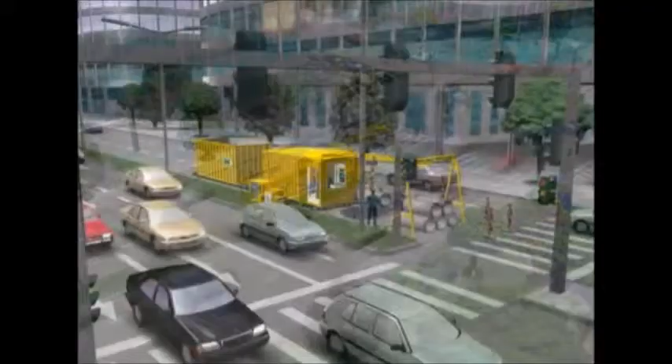The construction site can be located in a way that only one lane is affected.

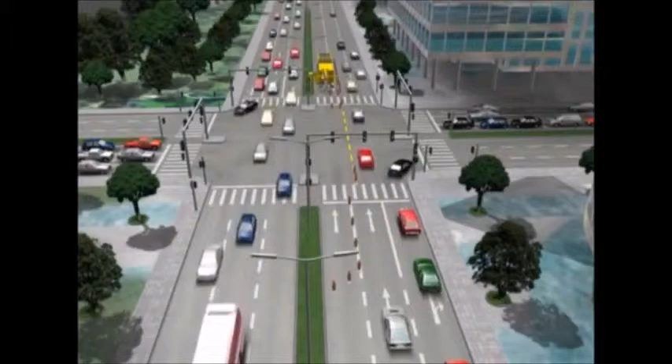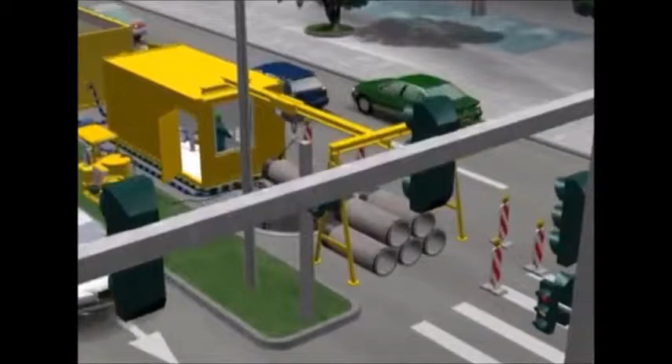In our example, 150 meters of sewer pipes are to be jacked from the launch shaft to the reception shaft. At the first stage, the area around the starting shaft is cordoned off and traffic is diverted to the remaining lanes. Due to the compact design of the machine and the small diameter of the starting shaft, there will only be minor disruption to the traffic flow.

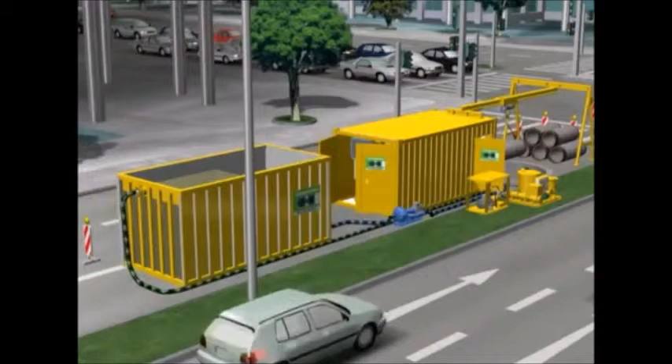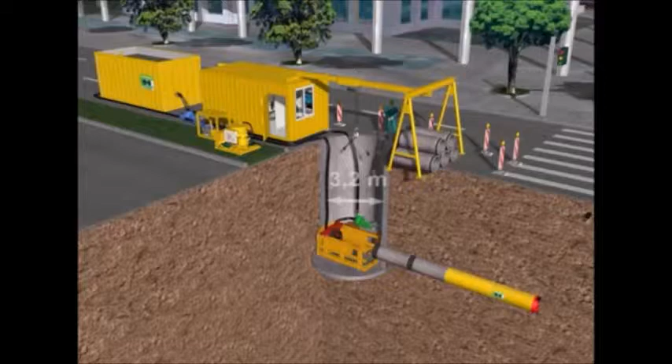In this case, the start shaft consists of a round shaft of reinforced concrete with an inner diameter of 3.2 meters. The compact jacking frame is then placed into the starting shaft, and the slurry discharge pump is mounted on a platform adjacent to the jacking frame.

The operating container with the control panel and the hydraulic power pack is located on the top rear side of the shaft. A pipe stock is established and maintained in front of the shaft to feed the shaft crane. The slurry feed pump and the slurry discharge pump are connected to the settlement tank to form a closed slurry circuit.

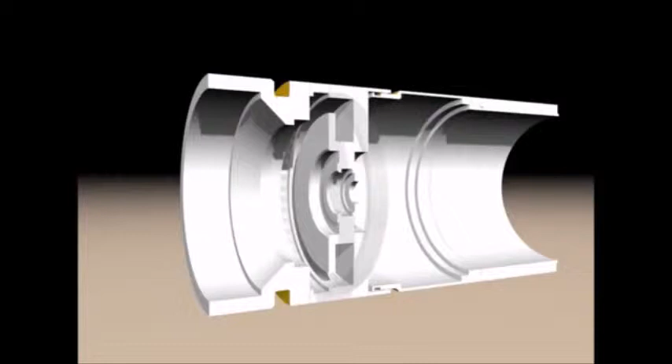The AVN 600 machine consists of several segments. A sleeve shaft with 3 boreholes connects the cutting wheel with the drive unit. The mix of crushed material and slurry water is sucked off through these boreholes by the discharge pump.

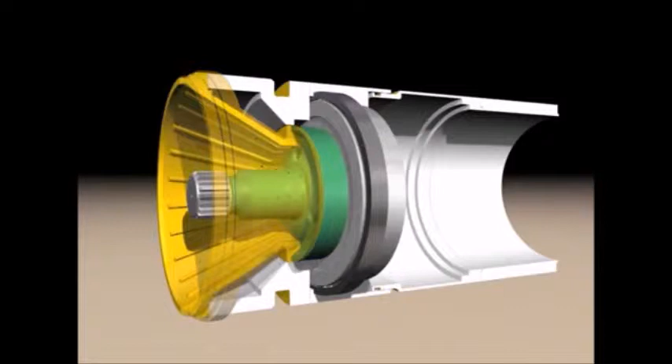The conical crusher situated in front has reinforced crushing bars and is provided with nozzles to inject the slurry water. The sleeve shaft, which is connected to the cutting wheel, is driven by hydraulic motors.

The sleeve shaft is seated in a tapered roller bearing. 3 hydraulic motors transmit the rotation via the gear rim to the sleeve shaft and the cutting wheel.

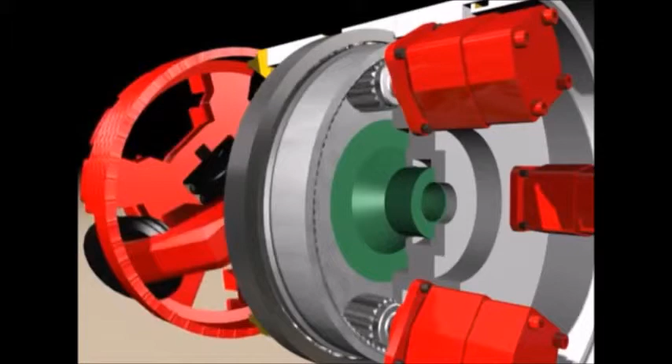3 steering cylinders enable the operator to correct the direction of the tunnel boring machine, as well as control the alignment of the machine in curved drives. Therefore, the position of the cutter head is continuously updated with the help of the laser guidance system.

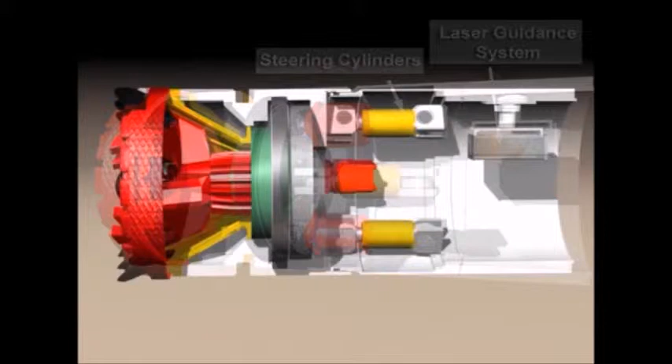To ensure the AVN 600 has a smooth method of excavation, the machine has 2 integrated water circuits. The standard circuit supplies slurry water to the annulus via 5 hoses fixed to the inner side of the bulkhead.

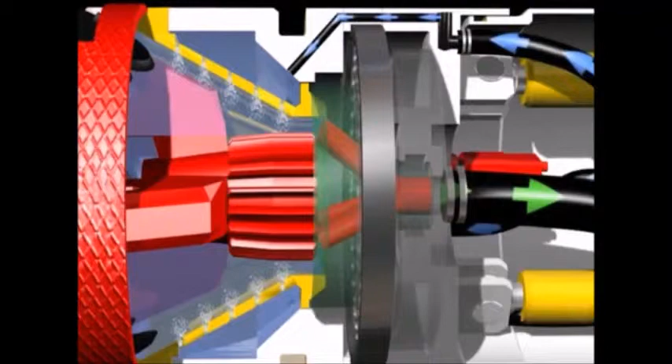Several boreholes branch off from the annulus, which supply the chamber situated behind the conical crusher. The slurry water is continuously pumped through the conical crusher chamber, sucked off through the boreholes of the sleeve shaft, and transported back to the settlement tank by the discharge pump.

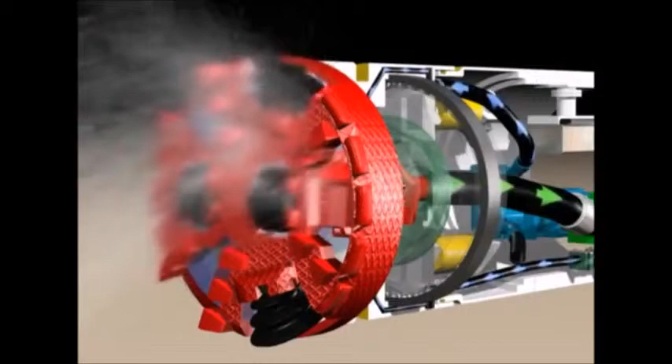A second hose supplies the high-pressure nozzles used in the conical crusher. These nozzles avoid clogging and agglutination in the crusher chamber in case of cohesive soils. They cut the clay in the crusher chamber with 250 bar water pressure, making material transport easier.

There are also 2 nozzles directed to the front part of the cutting wheel. This depends on the geological situation, as the number of nozzles can be increased. The water coming from the nozzles is mixed with the water of the slurry circuit and the excavated material. The whole mix is then transported to the settlement tank.

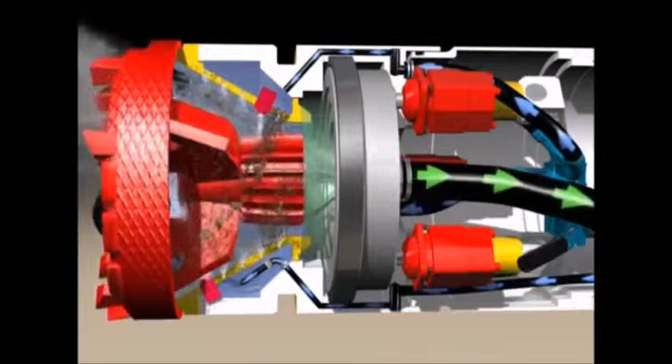The cutting wheel excavates the material at the tunnel face. In the crusher chamber, the material is ground down to the appropriate grain size by the spokes of the cutting wheel, which operates on the same principle as a coffee grinder.

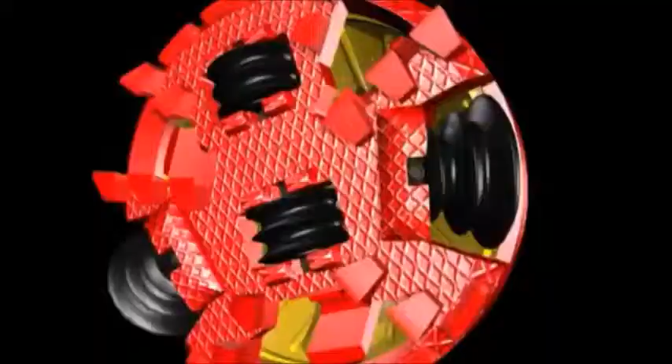Large stones are crushed by the discs of the cutting wheel. Sometimes fragments are displaced into the surrounding soil. Stones attaining the crusher chamber through the openings of the cutting wheel are crushed by the reinforced conical crusher and the spokes of the cutting wheel, and afterwards transported together with the slurry water to the surface.

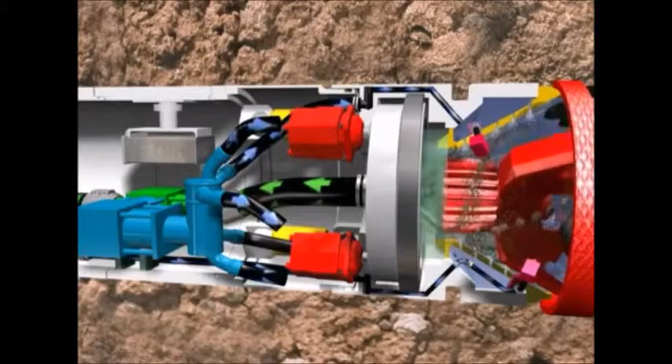The material is picked up in the slurry circuit and transported to the settlement tank through the central slurry discharge hose. The slurry feed and discharge lines pass through the jacking pipes via the jacking frame up to the surface.

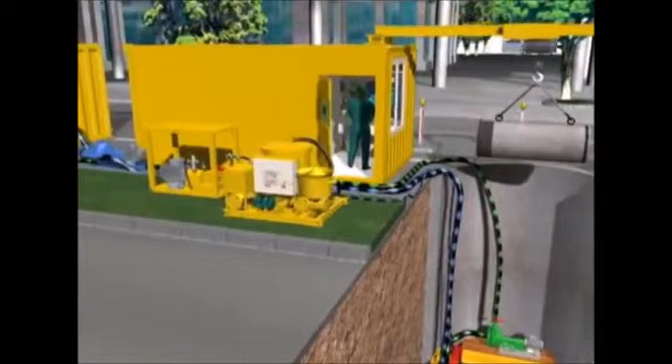The slurry discharge pump removes the excavated material and pumps it up into the settlement tank, which consists of 2 chambers.

At first, the excavated material is pumped into the rear chamber, where it settles due to gravity. The overrunning water is collected in the front chamber, from where the clean water is sucked by the slurry feed pump and returned to the slurry circuit, creating a closed system.

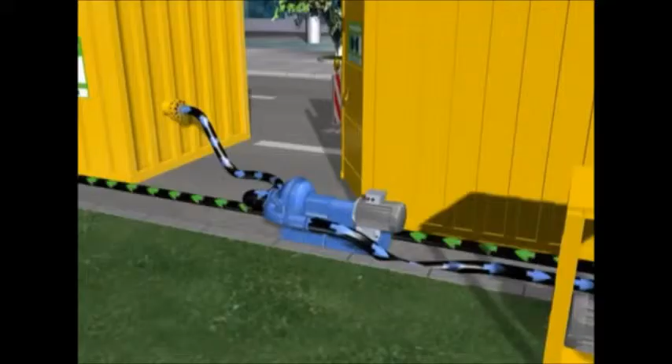The product pipes are lowered into the shaft, one after the other. The jacking frame works in 3 stages. After approximately 1/3 of the maximum jacking stroke, the jacking arms return and the main thrust ring of the jack can advance further.

After jacking the product pipe, all supply lines, such as hydraulic hoses, are disconnected. The jacking frame is returned to its original position and the next product pipe is lowered. This procedure is repeated again and again until the whole drive length is completed, reaching the reception shaft.

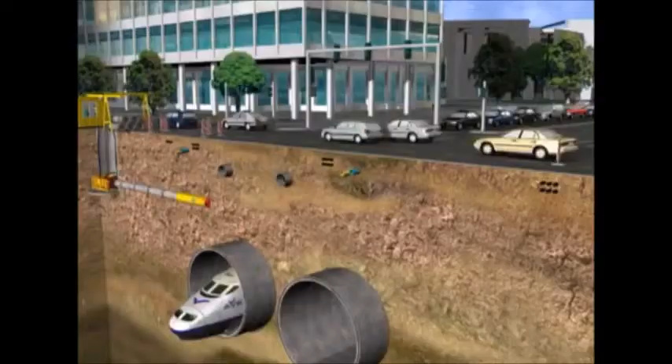Crossing pipes and buildings can easily be overpassed or undercrossed with this technique. Thus, the machine arrives in the reception shaft exactly at the planned coordinates.

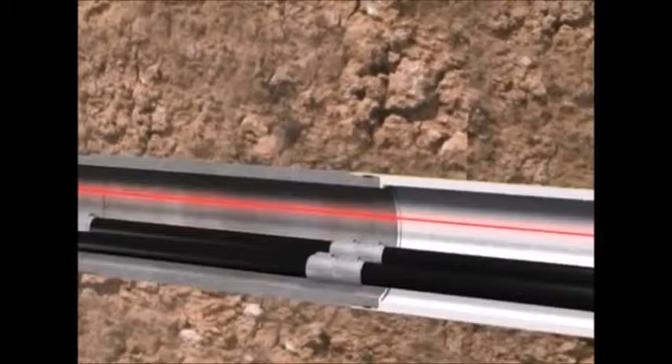The drive is continuously monitored by a laser guidance system. The laser itself is positioned in the starting shaft, meeting the laser target, which is installed behind the cutter head. The laser beam determines the reference axis.

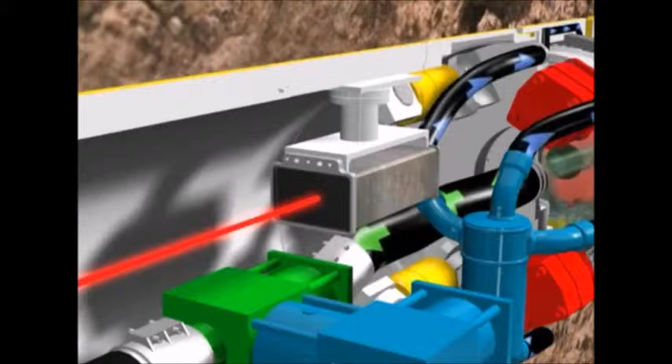The laser target identifies any deviation which may occur. The coordinates are transferred to the steering computer in the container and visualized on the screen. Any deviations in position can be corrected by adjusting the steering cylinders at the push of a button on the control panel.

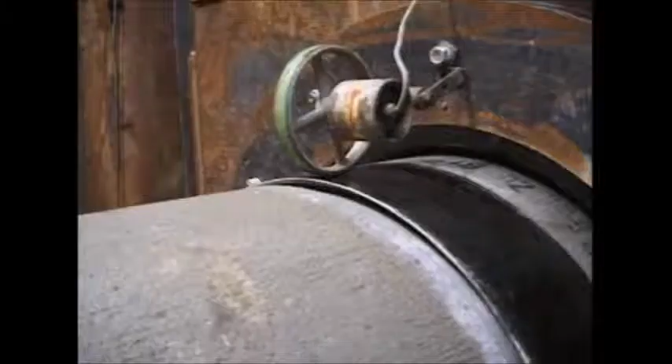The length of the tunnel is recorded by a metering wheel. This information is transferred to the control panel and allows the operator to determine the location and direction of the machine cutter head at any time.

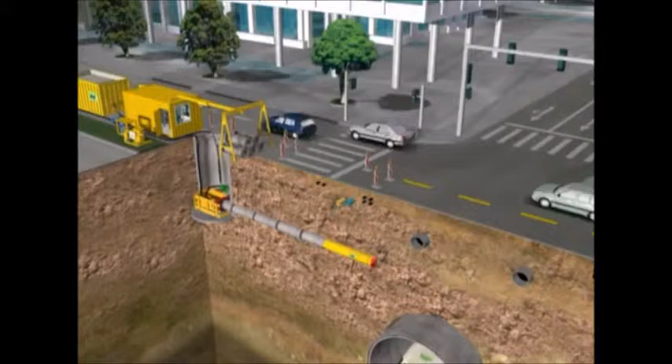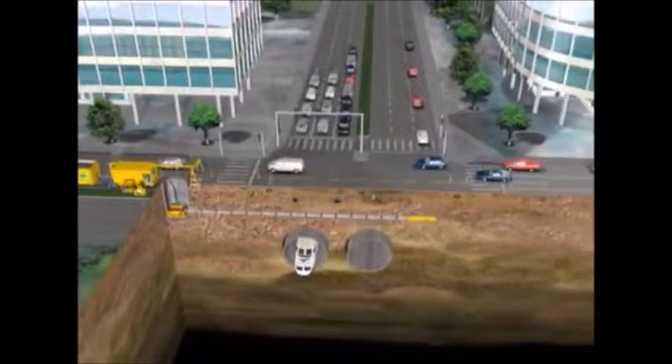In our example, a total of 150 meters of new pipes could be realized with only a minimum of disturbance in a sensitive infrastructure. The conventional open laying of pipes would have caused major disturbance and annoyance for traffic and the residents.